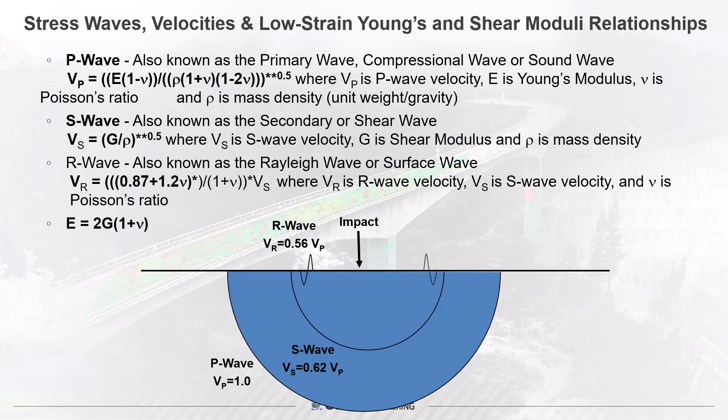Nine consultants and INDOT did NDT of concrete bridge decks in the fall of 2020 and summer of 2021. It was done with ground penetrating radar, both air-launched and ground-coupled, at both network and project level. Automated sounding was done at network and project level. Impact echo scanning was done at project level, and we were involved in that along with INDOT. Infrared thermography was done with aerial, vehicle, and pole-mounted methods at network and project level.

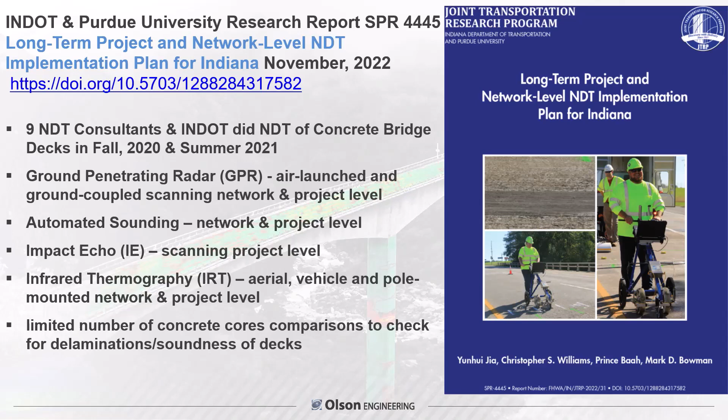Some of the key findings are summarized here. First, the impact echo results compared reasonably well between the two entities, and they were repeatable. Cores, interestingly enough, universally confirmed the IE delamination results. It's unusual, but it worked out very well—it's a very direct test.

The infrared thermography was comparable between entities—one purpose of the study was to see how repeatable the work was across different groups. It was more affected by shaded deck areas. I thought the previous presentation was excellent, very good—I hadn't seen bituminous work that well before.

There were small temperature differences, but they were a little less than those found with impact echo, though greater than values from automated sounding. They were dealing with bare concrete decks with various concrete overlays—no bituminous in their study.

Ground penetrating radar was very good, excellent for rebar cover depth, but the bridge deck deterioration results showed a lot of variation in values and locations. So they didn't want to recommend it as the sole method to evaluate bridge decks. It was valuable for corrosion activity, more like corrosion potential, and useful when combined with other primary methods like impact echo or infrared thermography.

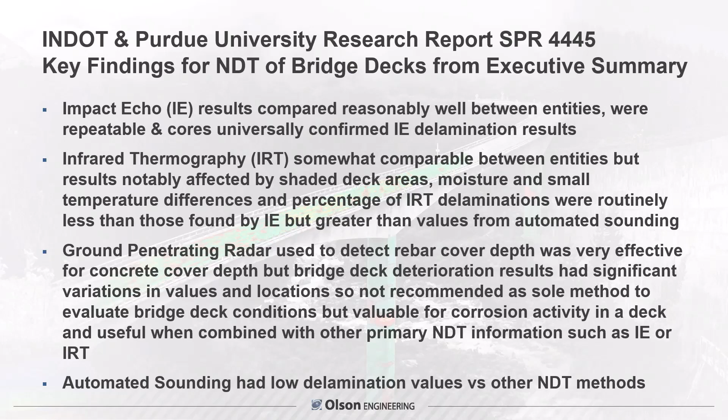Finally, automated sounding had low delamination values versus the other NDT methods. So going forward, the report recommended the following implementation plan.

Aerial IRT was recommended for network level inspection of a large number of bridges, followed up with network level vehicle-mounted inspection of problematic decks, possibly along with air-launched GPR to complement the infrared thermography.

Impact echo was recommended as a project level test for future NDT assessment to detect delamination and discontinuities in bridge decks requiring traffic control at the project level. Pole-mounted IRT was recommended possibly as a secondary project level method where there was a lot of traffic and getting traffic control was difficult.

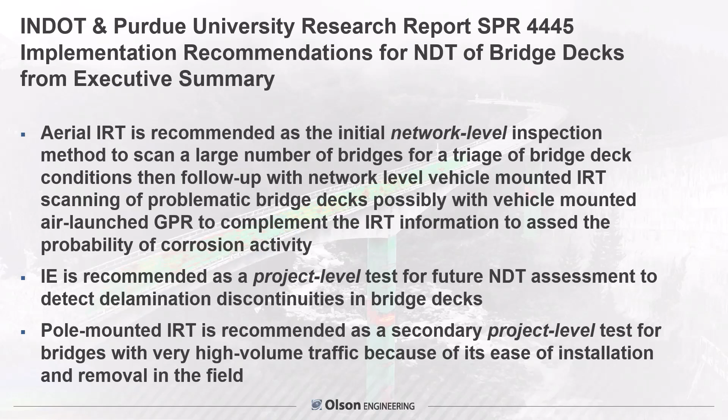Having said that, we'll get into the rest of the talk. These are five of the INDOT bridges that we studied along with INDOT in the state. Just to orient you, this is Indianapolis down here.

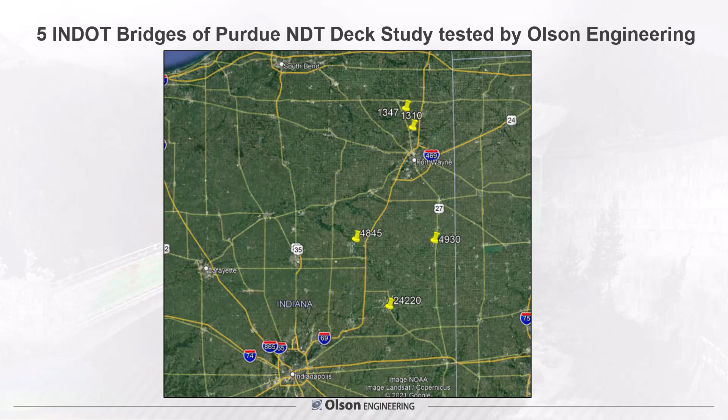So this is a deck scanner that we came up with. It came out of an NCHRP IDEA contract. It's slow rolling and walking, but very detailed testing.

So you have these sensor wheels, and every 6 inches—if you're doing impact echo only, typically separated a foot, although you can go from 6 inches to 9 inches to 12 inches to 2 feet apart—pushing along, walking typically a mile an hour. You can also do surface waves with it, which I'll explain more when you line up the sensors.

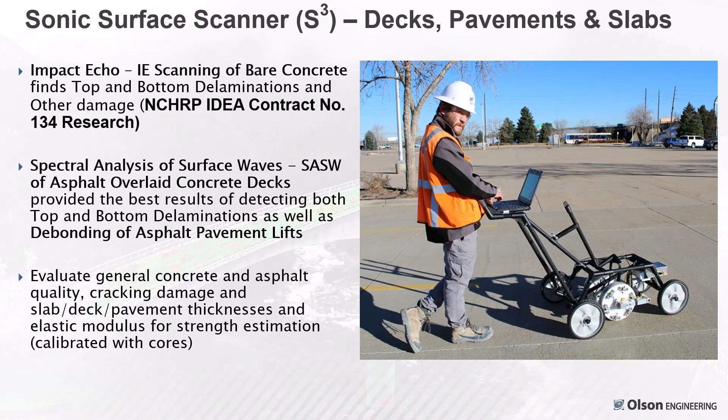Looking at concrete and asphalt quality, cracking damage, slab and deck pavement thicknesses, and even elastic modulus for strength estimation, calibrated with cores. So a close-up of those sensor wheels is shown here.

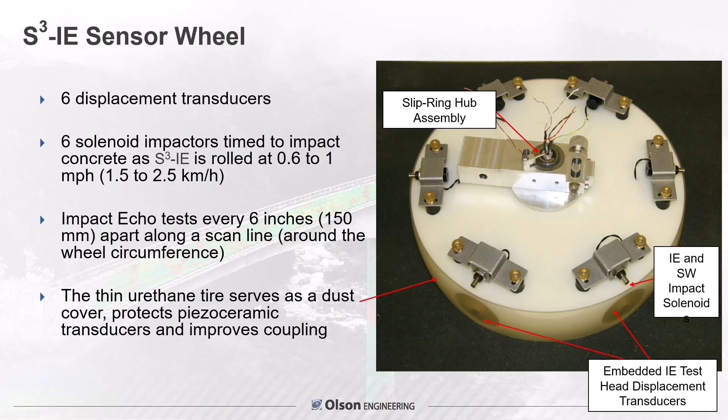These are the solenoids with the displacement transducers, with a thin urethane tire, if you will, that protects them as they're rolled along. They're spring-loaded, making good contact with these 20-pound wheels with the deck and sharply impacting it with the solenoids. So every 6 inches, as this is rolled, you get a test result on each of the 2 wheels.

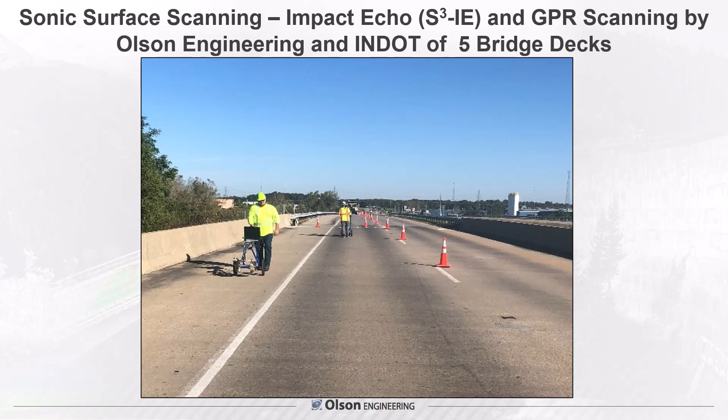This shows both INDOT and ourselves doing scanning, walking the deck. Indiana DOT owns a couple of these systems. Iowa has one of them. I understand Indiana DOT has done several hundred decks now. They're using it throughout the state when it's a project level approach.

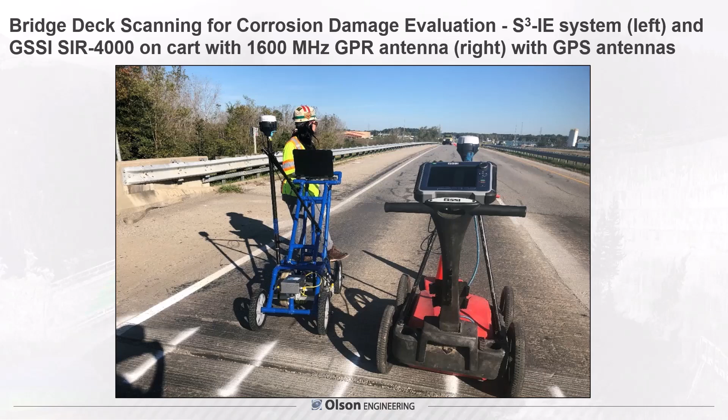We also did ground-coupled GPR with a GSSI system. This is the SIR 4000 with a 1600 megahertz antenna for comparison. And both units had GPS mounted on them for precise location of the testing.

There is an ASTM standard for the test, but the depth of the echo is equal to a shape factor, which is 0.96 on a slab, times the compression wave velocity divided by twice the frequency, or resonant echo frequency. And it varies—it's a lower shape factor if you have multiple echoes, resonances in beams and column shapes. But in a slab, you have one main echo.

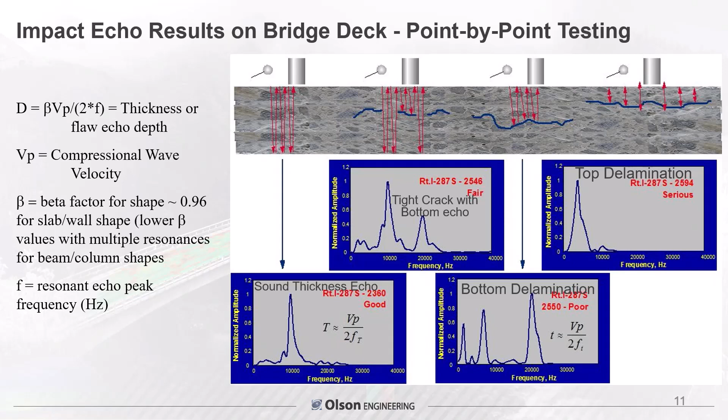You've got here a bottom delamination where it's a deeper echo. And a top delamination shows up as a flexural resonance, because it's that hollow drummy sound you hear when you do automated sounding or acoustic chain dragging.

So here's an example of a scan line result. This is the distance scanned. This is the deck thickness—probably a little hard to see, but that's 0 to 20 inches, nominally an 8-inch thick deck. In this result, or 9-inch thick deck, you've got one signal here at this red cursor, and that's the frequency of it. The frequency of the echo then shows up nominally at 8,000 hertz, corresponding to about 9 inches.

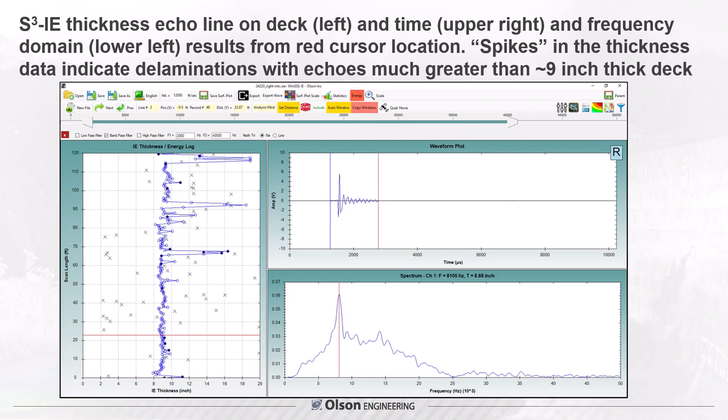That's a sound result. Some delamination areas are looking thicker in this scan, and that's what you're seeing—the delaminations are these extra thick, low-frequency resonant echoes.

So point-wise, these are all the tests on this particular deck, Bridge 24220, and you can see all the many points before any smoothing is done. Here's an echo depth scale from delaminations into the expected thickness range, into shallower echoes, indicating bottom steel cracking.

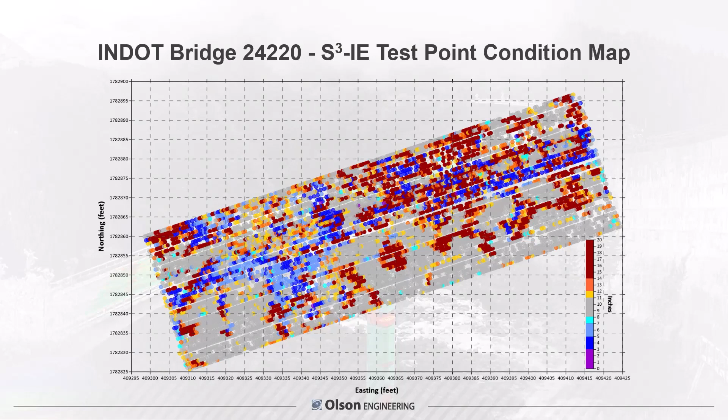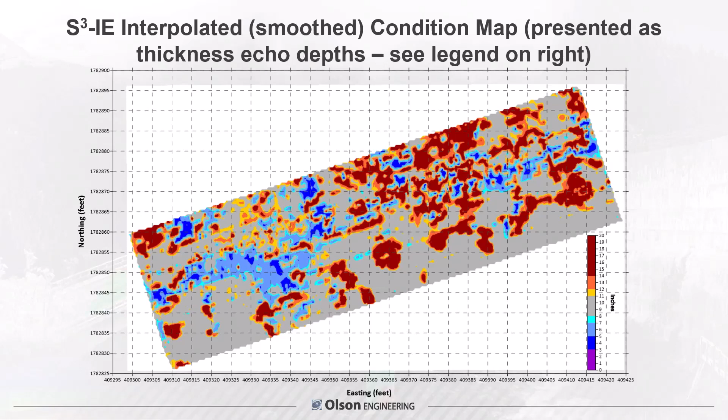Delamination—here's the smoothing of it, a little easier to look at instead of all the specific test points. But keep in mind, it's 1 foot spacing between the wheels. Every 6 inches a test is being done. So it's very detailed testing.

We took simple photogrammetric images just by walking it with an iPhone up on a rod. It was that simple to get the data and stitch it together in the software.

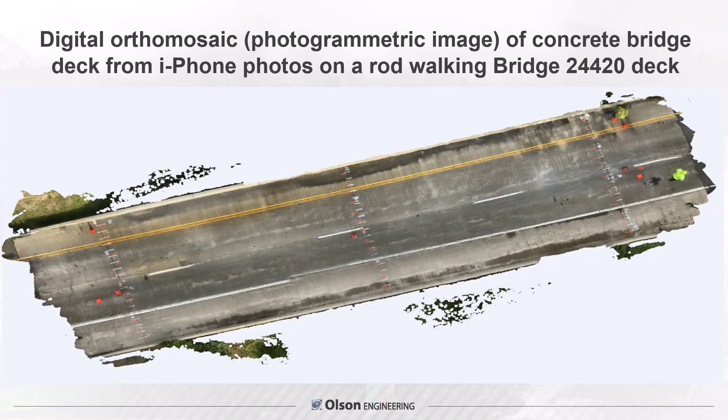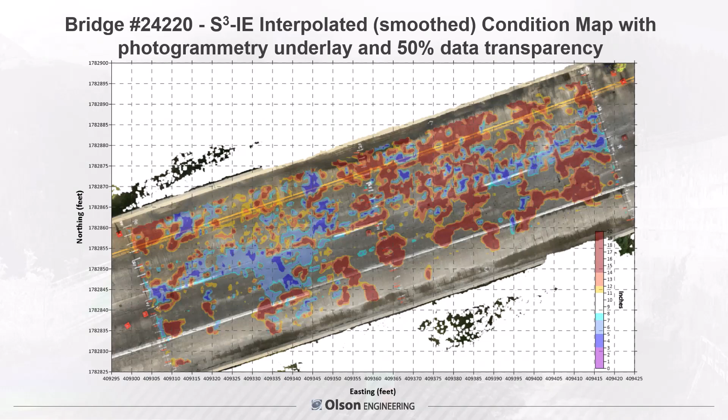So for the 5 bridges, detailed reporting was made of course, the measurement percentage and areas for these different bridges. The 24220 bridge I've been showing examples from is the bottom one. The amount of near-surface delamination ranged quite a bit in terms of percentages.

This particular deck had 20.5% delaminated. Top delaminations are called out where there's also possible top delamination in yellow, orange, yellow, cyan—the different colors. Bottom delaminations to see deeper.

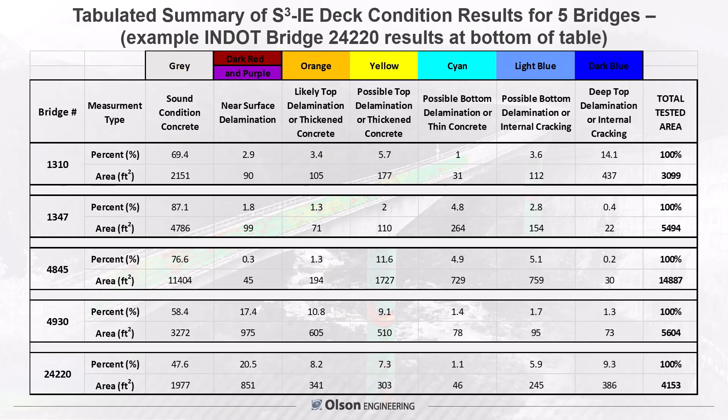When you don't have a top delamination, impact echo will penetrate to the bottom of the deck and check that as well, if there's a bottom steel delamination. And there are certainly bottom steel delaminations. Then finally, deep top delaminations, total tested areas are all called out. And this is where the coring showed 100% correlation, where impact echo, both by INDOT and ourselves, correctly identified the delaminations.

So here's an example GPR scan from the ground-coupled GSSI system. It's just showing all the rebar, the variation of cover depth along this scan length.

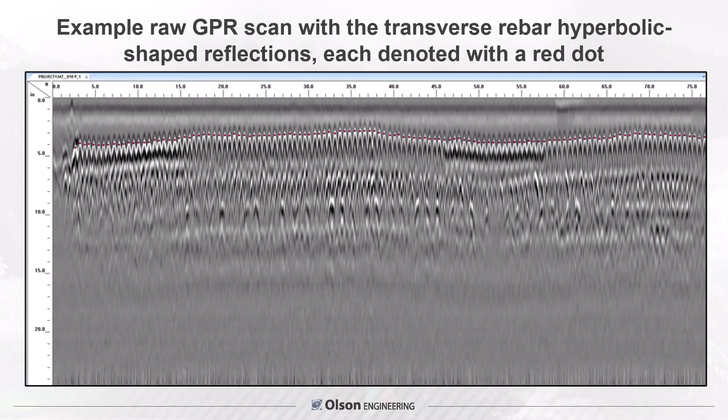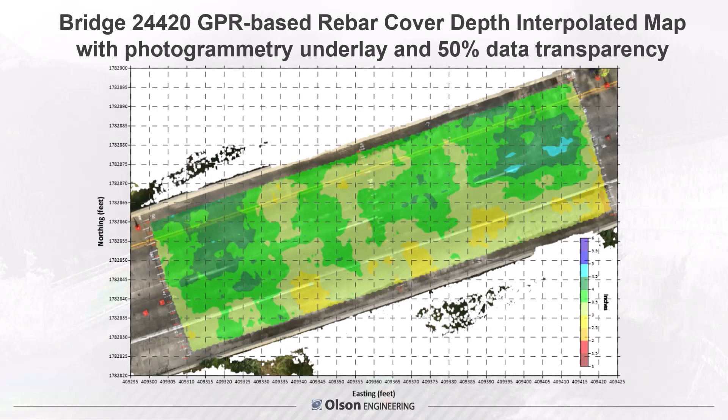So putting that onto the photogrammetry underlay with 50% data transparency shows the cover depth. It's going from nominally about 2 inches up to 6 inches in this color scale. So this is showing your depth of cover, which is an important part of your long-term service life evaluation.

When you look at chlorides and carbonation and predict remaining service life, here's the 20% percentile cutoff. Attenuation of the radar signal is what we're looking at, following this ASTM standard to show possible areas of likely potential corrosion. You can see the attenuation curve going down in the amplitudes and showing this scattered all over. That's, again, on an overlay of the likely corrosion areas.

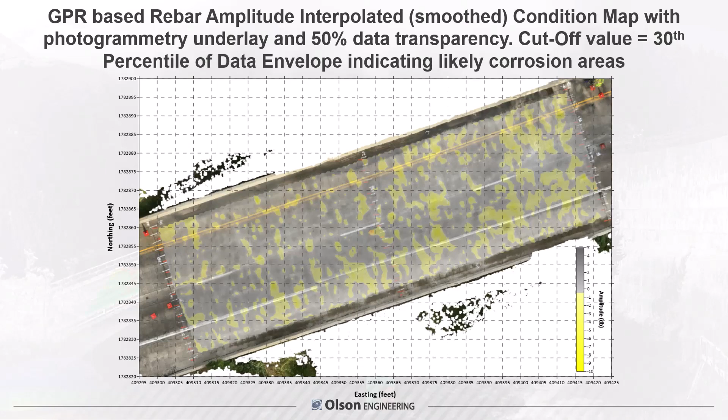And here's a comparison of the sonic surface scanner, so-called S-cubed, impact echo scanning, with the delaminations and bottom and everything else, with the GPR. I should mention the GPR is sensitive to the top steel. You're not seeing the bottom steel in terms of most attenuation studies. It's the top steel you're looking at, whereas in the impact echo results, that's both top and bottom rebar damage. There's correlation, but you can see the precision here is much more than in the radar results, even at this ground-coupled study that we did.

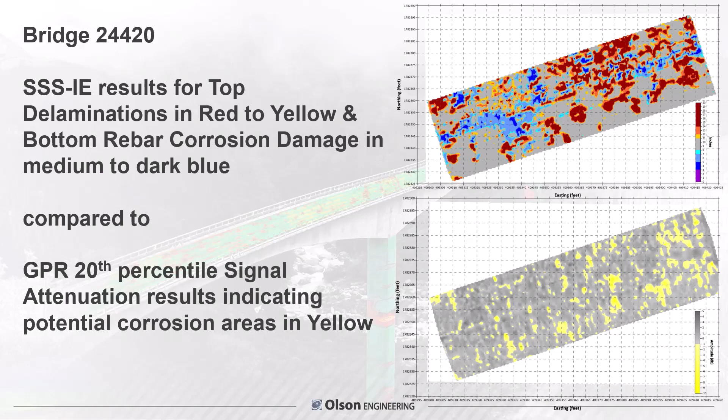So now shifting gears slightly, I thought I would show we have put the wheels occasionally behind a vehicle. We did this first for a National Center for Asphalt Technology, had a SHRP 2 R06D grant I'll mention in a minute, where we were scanning asphalt for debonding and delamination.

But basically what you see here is this was done in the upper Midwest. There were 42 lane miles of interstate highway pavement scanned with 2 sets of wheels in the wheel paths, because they were concerned in this jointed concrete pavement about dowel cracking. So there was cracking where the dowels were, and it extended out further than the dowels in this nominally 12.5 inch thick pavement. So by doing this at 1 mile an hour in the wintertime, we were lucky.

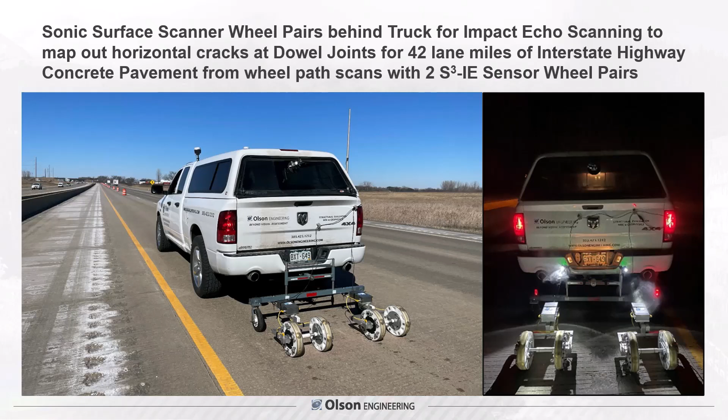We had only 1 snow event in February, but it was there. It stopped us for a while. But we're rolling along nighttime or during the day, depending on traffic control and where we were, literally getting every 6 inches alternating impact echo tests left and right on the 2 sets of wheels. So it amounted to over 2 million tests, but it took us about 10 days to do the project. It took a while to scan it, for sure, with traffic control. But it was mapped out very accurately, as you'll see.

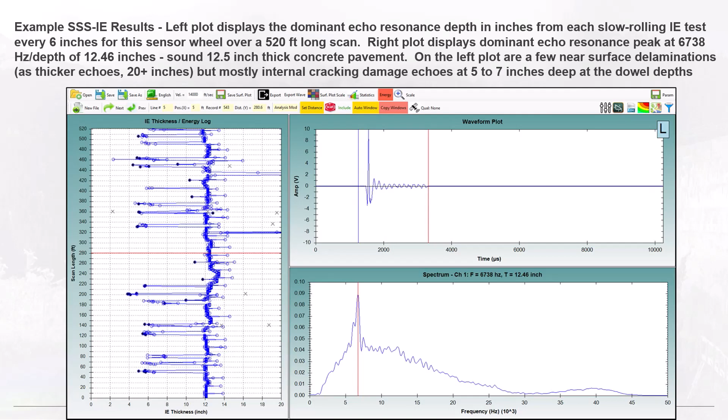You have to have a speed of sound that you're using for the project. This shows an example result here where there's more dowel damage echoing around plus or minus 6 inches, between 5 to 7. And here's an echo that shows a much higher frequency, 13,000 hertz, 6.2 inches deep. This is at the depth of the dowels.

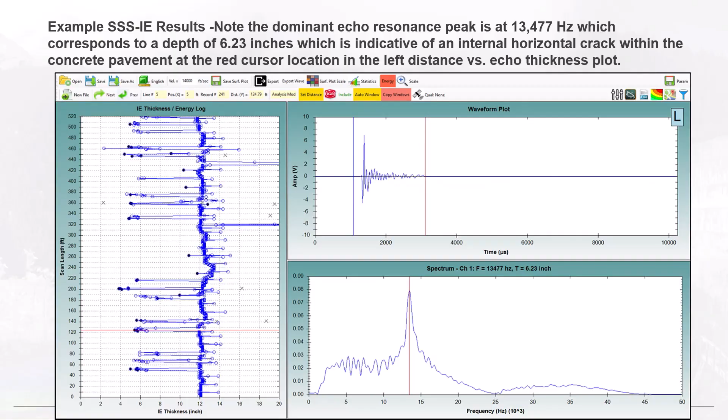It was interesting to see in plotting that as you see the wheel paths in the results here, where it's plotted in red, it extended beyond the dowels. It was associated with the joints, but it was longer than just the dowel length of about 3 feet across the joint. So this all got mapped out for evaluating repair approaches and where it needed to be repaired. And the DOT thought the damage had probably occurred very early in the life of the pavement. Maybe some warping of the slab or something occurred to cause the cracking associated with the dowels.

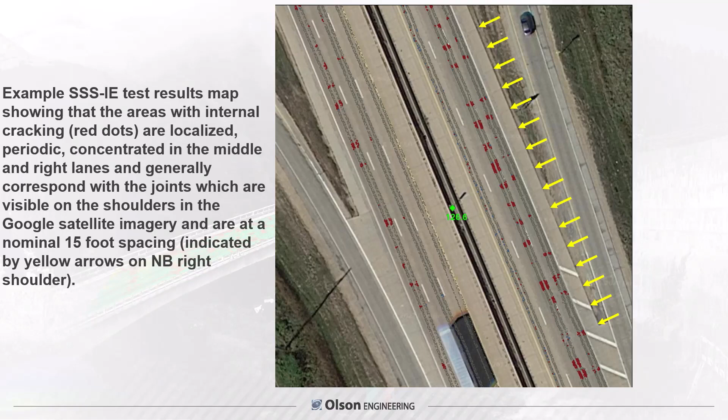But nonetheless, it's more sensitive to not being so deep. Impact echo scanning doesn't work well because the asphalt's usually warm. If it's colder and more concrete-like, it can show and test through the asphalt into the concrete as well. But once it gets much above 50 to 80 degrees, it doesn't resonate well. It's very viscoelastic with temperature, much softer, and does not echo well.

Whoops, too fast. Okay.

My finger's getting too big.

Ground penetrating radar is complicated by de-icing salts and moisture. It's often present at the asphalt to concrete interface, if there is debonding.

Surface waves. We learned about surface waves and the ability, we've been doing it for a long time. I've been doing non-destructive testing for about 43 years now. My professor, Ken Stokoe, I should give credit where credit is due, and my office mate in 1979 first started researching spectral analysis of surface waves at the University of Texas at Austin when I was in graduate school for the geotechnical program there.

In any case, it was extended to detect concrete delaminations below asphalt overlay decks. We were involved in a study, SHRP 2, at Auburn University by their National Center for Asphalt Technology to look at the delamination of new asphalt pavement lifts or debonding of those lifts. And from that we said, okay, maybe we can extend this to an asphalt overlay deck, and that's what we did.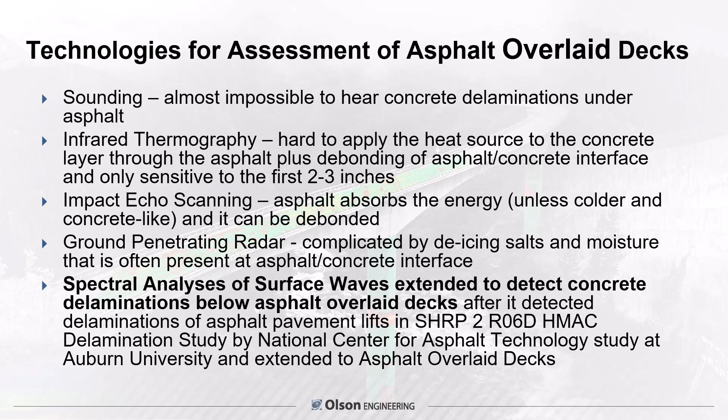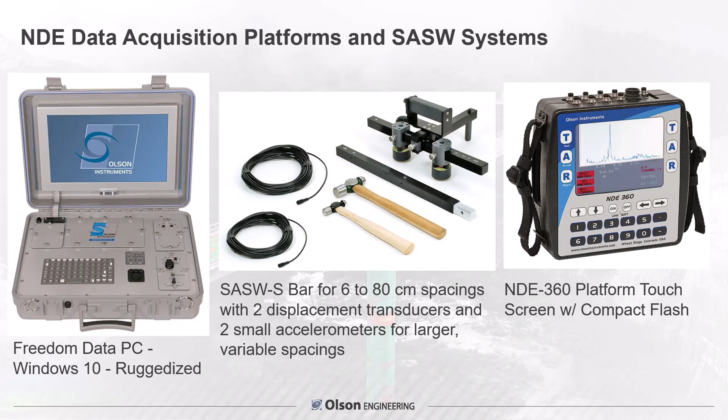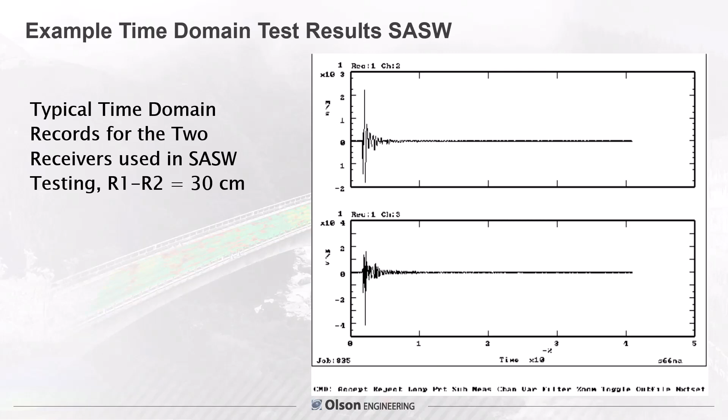So here's a basic result showing time domain records for 2 receivers, a foot apart, 30 centimeters. The big spike is the surface wave energy. So you window in on that and you get phase, and this is very high quality data right here. Phase is just the difference in how fast and the time it takes for the surface wave to travel from the close receiver to the impact to the far receiver of the impact.

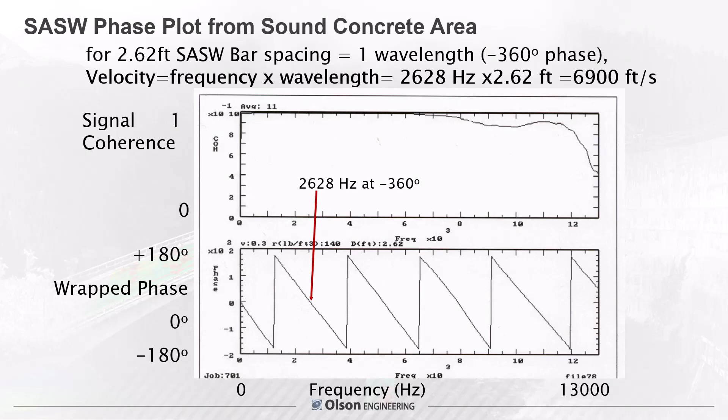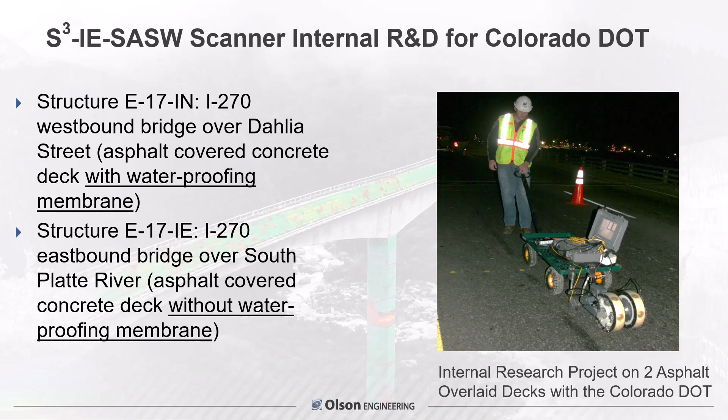Instead of being offset 3 inches, so you get left, right, impact echo, you hit on the left to get an impact echo result here, and the surface wave test is done between these 2 aligned transducers, which are typically spaced 6 or 9 inches apart, depending on the thickness of the asphalt.

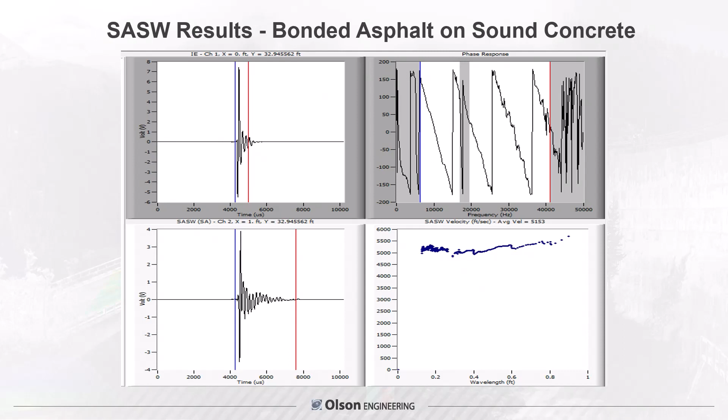So we did these 2 decks for the Colorado DOT. This shows bonded asphalt on sound concrete. The spikes, the windowing, the velocity versus wavelength. This is 0 to 1 foot going through that deck of a velocity around 5,500 feet per second, roughly, and good data, but bonded, no differences.

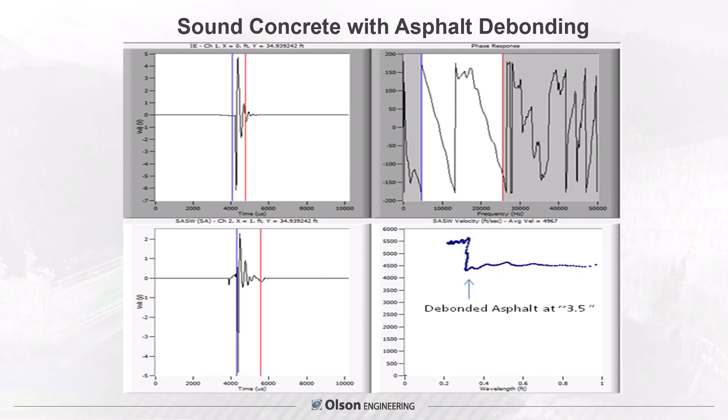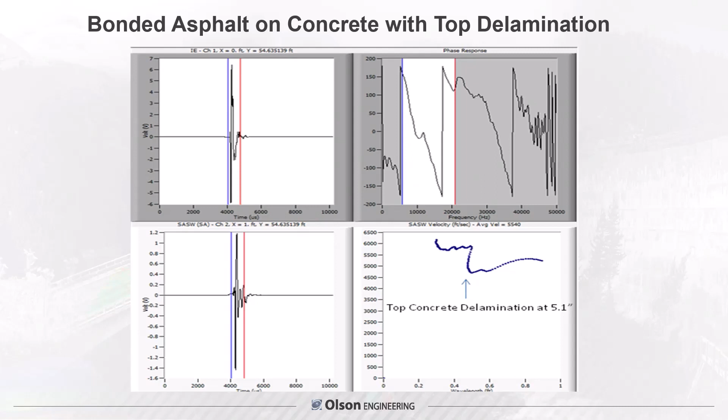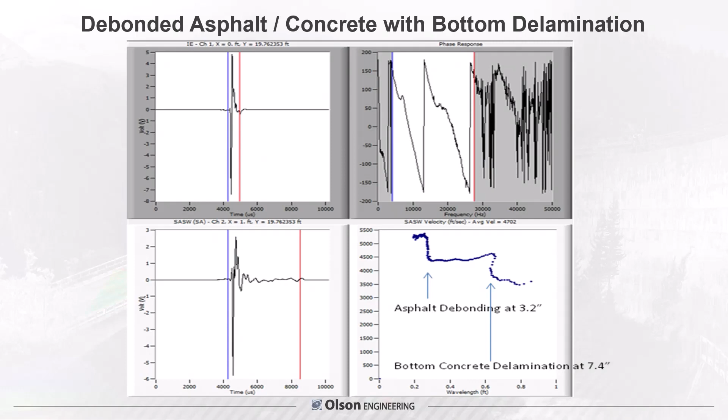Finally, here's a bottom delamination where there's 2 drops. There's asphalt debonding at 3.2 inches, followed by a drop at 7.4 inches at the bottom steel, where there's a deck delamination. These are the 2 phase where this is 0 to 50,000 hertz. This is the deeper bottom delamination of the steel. This is the debonding of the asphalt.

So what we did was an initial blind study, meaning we tested through the asphalt. Then they scraped off the asphalt. They were going to repair the deck, and they used hydrodemolition to clean up the steel.

This is our map that we gave them in advance of where we thought it was delaminated, from the surface wave results. You can see in the picture and the scaling, from 50 to 70 feet, it agreed very well with what we were predicting. You could see where the concrete was indeed delaminated, cracked up, and broken, and the hydrodemolition removed it as they repaired the deck. So excellent correlation.

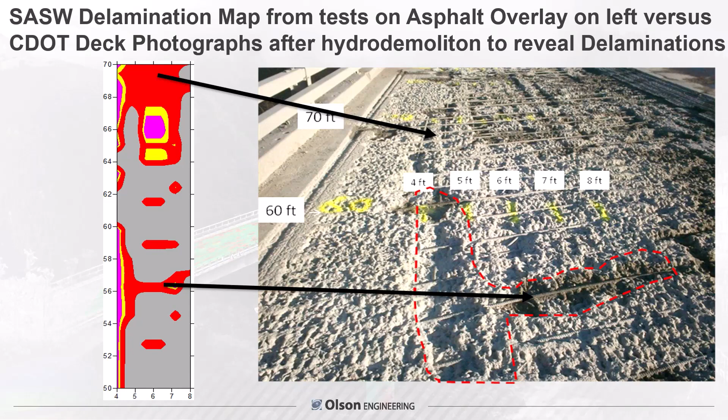We've gone on to test well over 30 decks that were asphalt overlaid, with good results confirmed by coring and other methods. So here's just a quick summary.

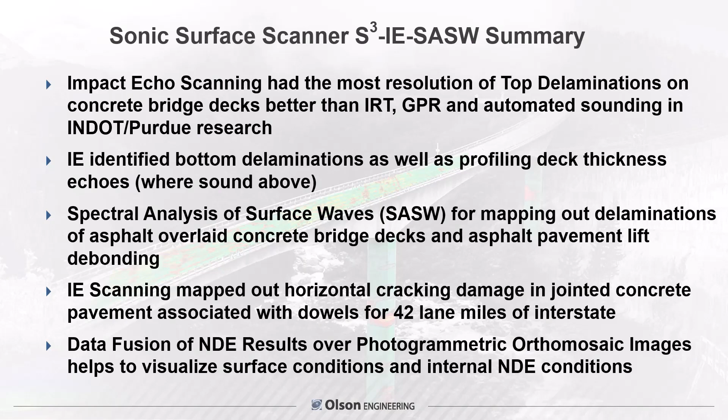Impact echo scanning was the most accurate in terms of the Purdue and INDOT research. It identified bottom delaminations as well as deck thickness. Surface waves was found to be good for mapping out delaminations of asphalt overlaid decks and asphalt pavement lift debonding. The scanning mapped out horizontal cracking damage in the jointed concrete pavement associated with dowels for 42 lane miles of the interstate, and data fusion was useful to overlay the results.

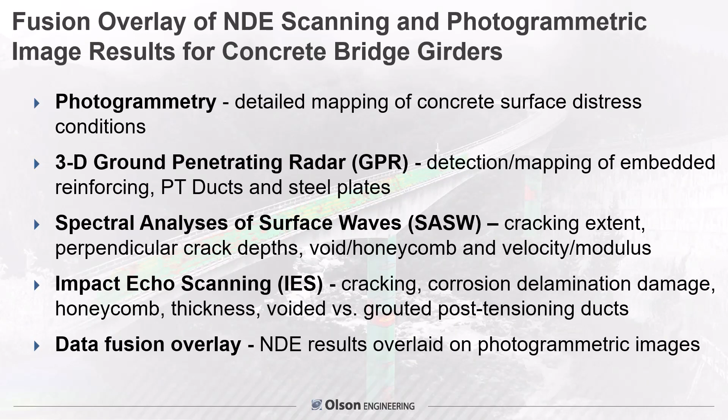So here's the digital photogrammetry, just laid out. We laid out a 6-inch grid on this joint. This is actually a cantilevered girder on this side, with a drop-in middle span that's also post-tensioned to another cantilevered girder. It's a really unique old bridge. It's 20 inches thick right at the joint, and more like 7.5 to 10 inches thick in the webs as you move away from the joint.

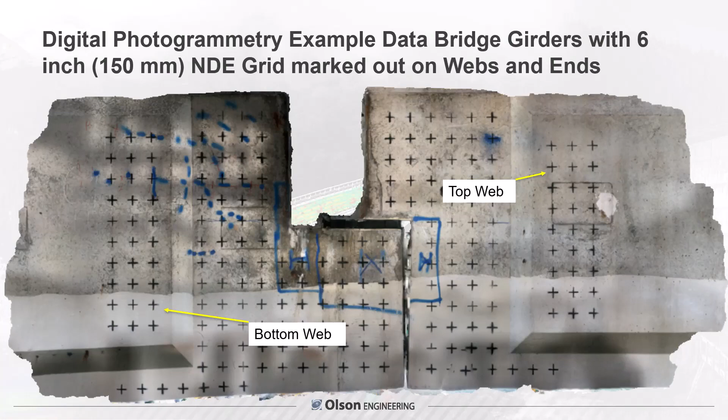So there you see the image, very detailed. There was a nice presentation yesterday on photogrammetry. But for the physical principles of radar, you can go to this ASTM standard.

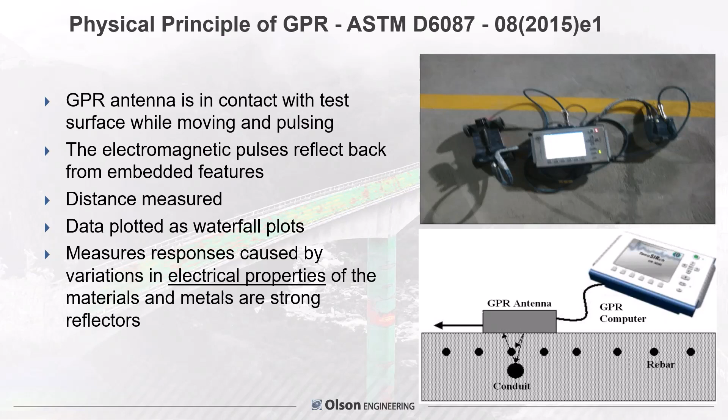Basically, as you move along, it reflects from changes in dielectric constant, meaning the steel stands out very strongly because it's conductive, and it's excellent for mapping steel. As you move along transmitting and receiving, structural radar is typically around 1.6 to 3 gigahertz.

At higher frequencies, corrosion shows up as a lower amplitude reflection, kind of a fuzzy reflector, but lower amplitude. So if you have a corroded rebar versus a non-corroded rebar, the basic physics means this is a weaker signal.

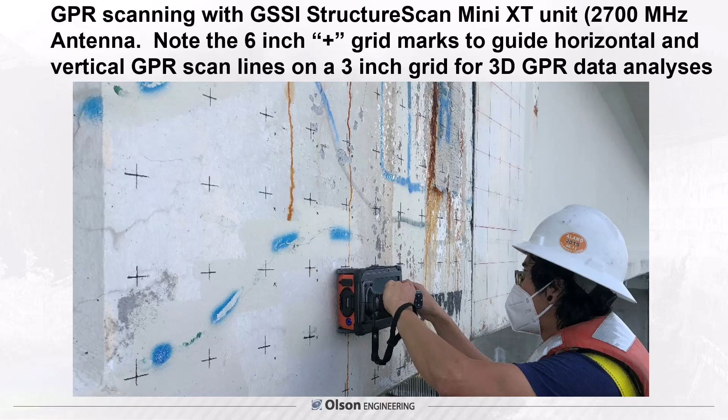So here we are scanning in two directions with the GSSI Miniscan XT unit, StructureScan Mini XT, 2700 megahertz antenna. You see the results on screen, very nice. We went at a 3-inch grid in both directions because we wanted to image it, so we're doing kind of a tomographic analysis.

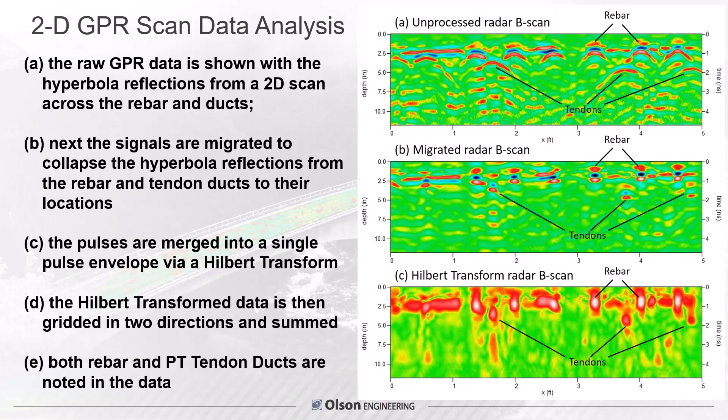Basic processing with 2D radar shows the unprocessed scan. Deeper tendons have a broader hyperbolic shaped reflector versus the shallower rebar. This is depth and this is distance scanned, that's 5 feet. You can migrate it, collapsing it into the shapes of these hyperbolas, showing both the deeper tendons and the rebars. Finally, a Hilbert transform can enhance the viewing of that a bit more in terms of the images.

So when you take all this together and combine it, this is what I mean about it being complex. They had shop drawings, but they were more like design drawings. They thought they probably built it this way, but they wanted to check and see if it was built that way, because they wanted to get another 5 years out of the bridge before they replaced it, if they could, by repairing it.

So in any case, this is an embedded steel plate. Here's a small one, you can see it with somewhat clarity, not perfect, but you can see where the shapes are. This is certainly some angled stirrups and rebar. These in the webs are easier to see, and the post-tension ducts are showing up over here.

And so all of this was put together in a radar sense to image it and check it. And it pretty much confirmed it was built as they thought it was built.

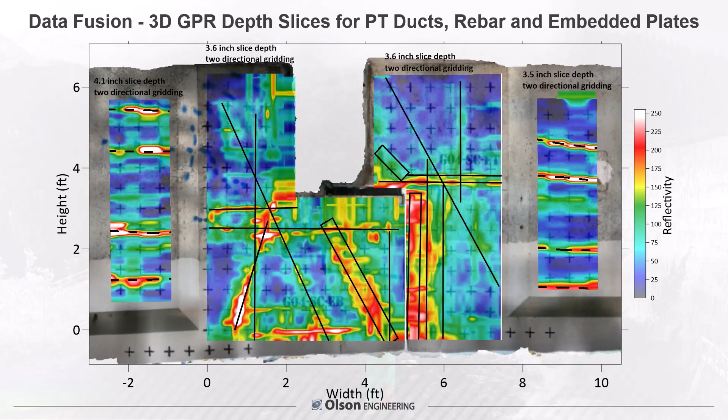So we also did surface waves across cracks to see how deep they were. It's up to 20 inches thick when you're right on the thickest part of the joint. So it was hit in line with this to get the results.

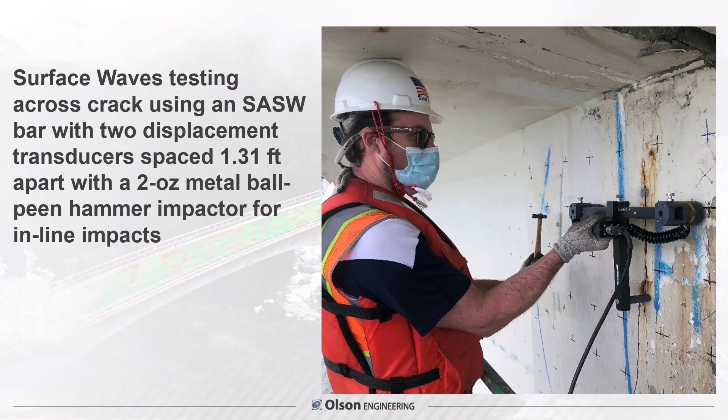We saw results of velocity versus wavelength. This is velocity, around 7,500, 7,000 feet per second. The drops in velocity show from 4 to 8 inches. This here is across the crack, showing it's about 7 to 8 inches deep from the surface, and then the velocity increases. That's typical of what happens around a crack. It gets slower until you're beyond it.

And this is a more normal result where it was in the web and it was not so thick, only 7.5 inches thick, when the velocity drops as you get out of the web. So we took that data.

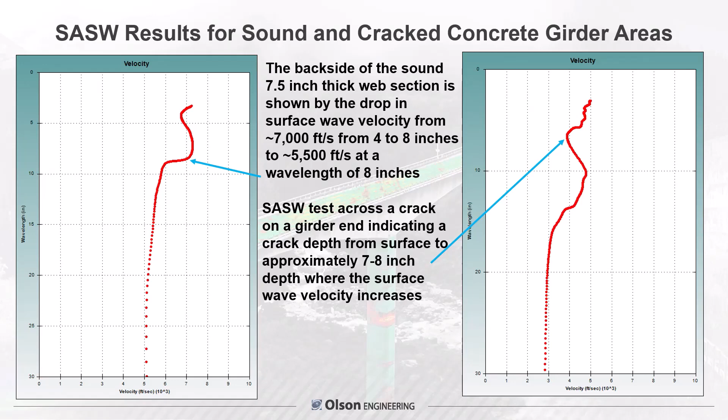Then we did impact echo. Obviously a problem in post-tension bridges is voided versus grouted ducts and corrosion of the strand in the long term. So we came up with this years ago - I was sitting on an airplane when I thought of this idea, after doing endless point-by-point testing. I said, we've got to be able to scan. So the impact echo scanning idea was born because of the tedium of testing forever.

So it ended up being this system. We've sold a lot of these, interestingly enough, to China because we used to sell a lot to China. They're not as popular now. We recently sold another one. I think there's some political issues going on. But they were doing a lot of post-tension bridges, and they used a lot of quality assurance of voided versus grouted ducts on new bridges.

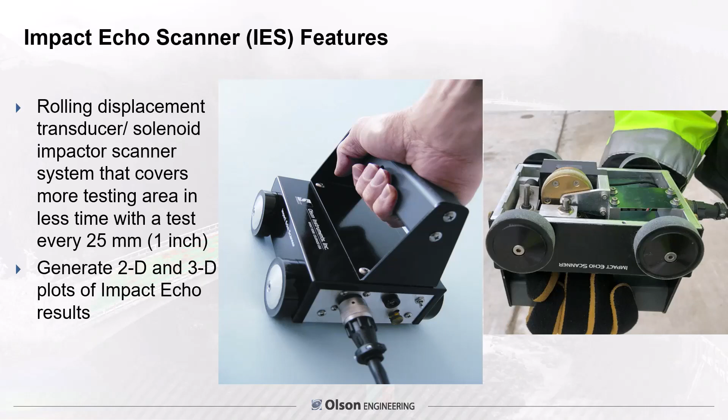So in any case, it's spring-loaded. It was the progenitor, if you will, of the bridge deck scanner, the sonic surface scanner system. It's spring-loaded with a sensor every 1 inch. You push it along. You have a choice of a larger solenoid or a smaller solenoid, and it impacts every 1 inch as you scan.

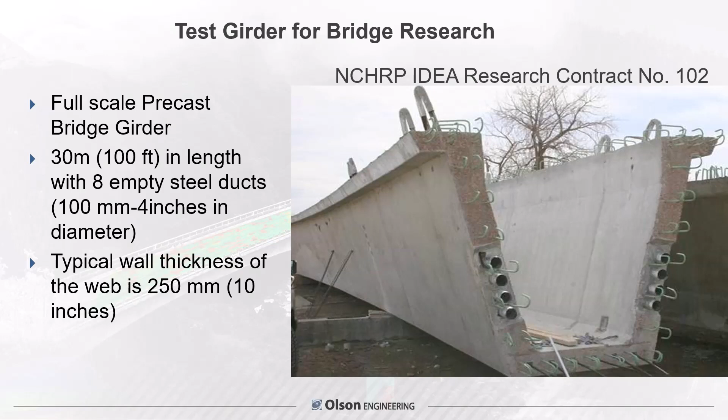We had a research girder donated to us. We did radar on it. We were so lucky to get our research girder donated. They were not lucky - they blew the grout of the ducts. It was junk to them. So we said, okay, can you donate this $50,000 girder to us? And by the way, please leave it in your yard. We can't put it at our office.

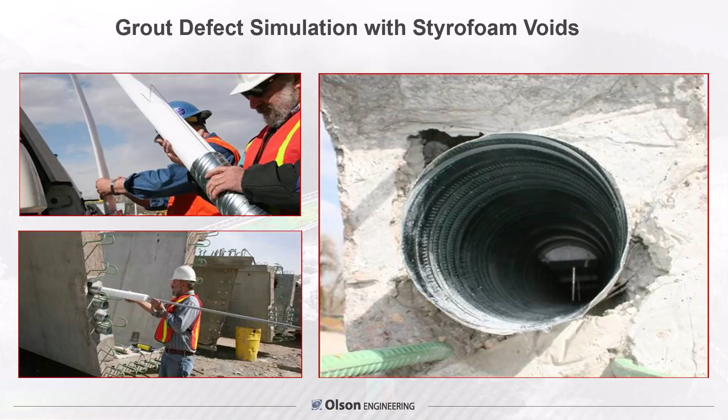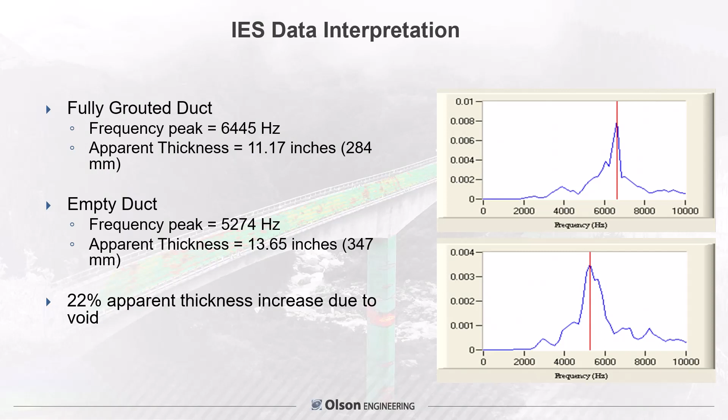They did. So we had a contractor grout them, created defects with styrofoam voids. This was an NCHRP study as well. Basic physics: when it's fully grouted, it said it was about 11 inches thick. It looked thicker when it was an empty duct because there's a hole in it - it's going to resonate at a lower frequency. The basic indicator of a voided versus grouted duct, or honeycomb.

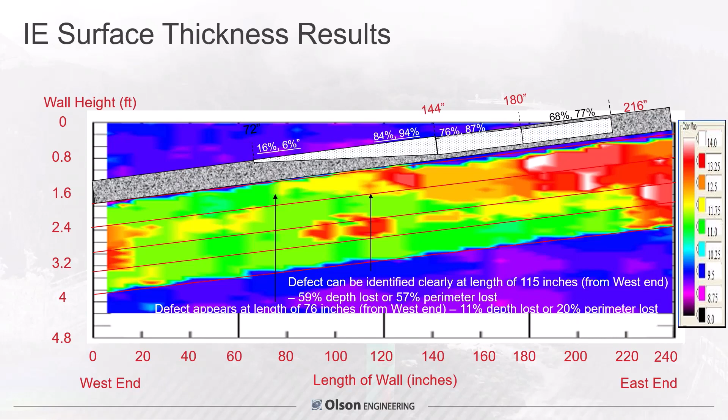Could be honeycomb, but in this case it was voided versus grouted ducts. So we plotted that all up in a color scale, going from the normal thickness of 11 into the reds and whites, much thicker. This shows what the void that was built and how it looked in the results. You can look at that in a skewed sense and see over this 20-foot length that we used where it was more voided, and it agreed very well.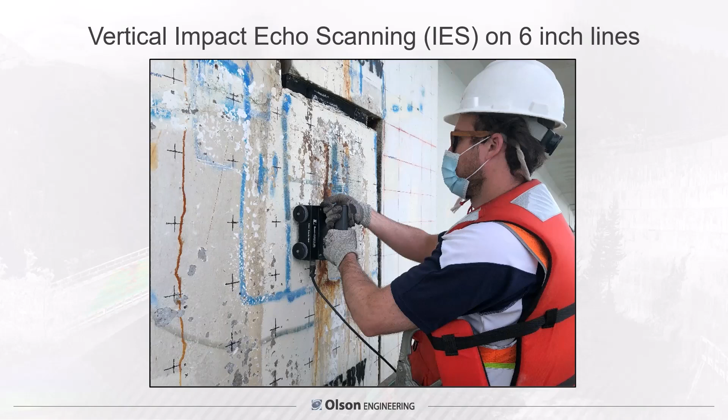So on the old bridge girder project, we scanned a number of girders vertically on a 6-inch grid, pushing it up the wall. Here was a sound result - well-grouted ducts, 7.5-inch echo thickness in the web. This, on the other hand, showed a nominally 8 to 9-inch thickness on this web, but it increased to 12 inches where there was an ungrouted duct. So we could identify that.

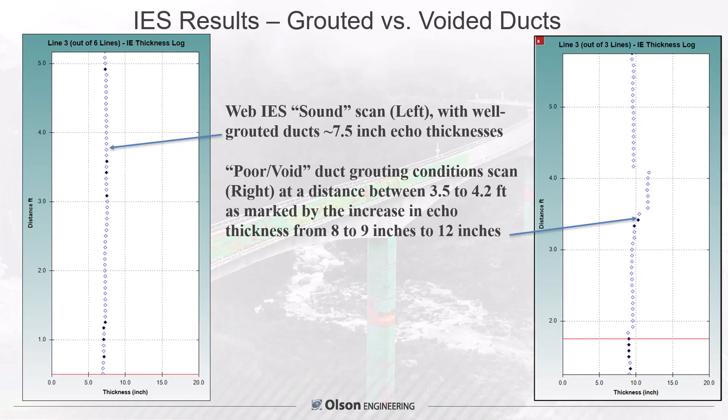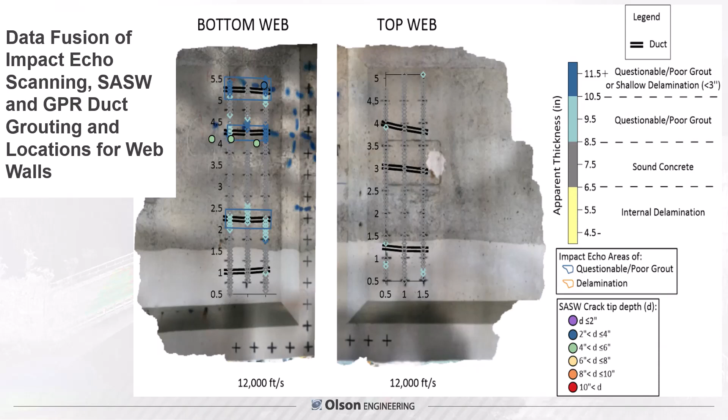And that correlated because we knew from the radar there's a duct there. So we put that all together, again fusing it all, showing the impact echo areas of questionable or poor grout in these color scales, and surface wave crack tip depths on this color scale from 2 inches to 10 inches, and also showing the radar results as to where the ducts were located. Here's right at the joint. Those were web plots there, right at the thicker joint of 20 inches, and we did do radar from both sides on this to cover it well.

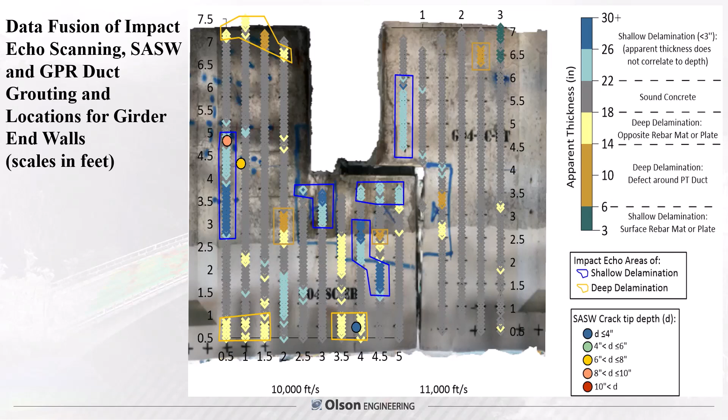But again, you can see all the results from the impact echo scanning, as well as the surface wave testing across it in that regard.